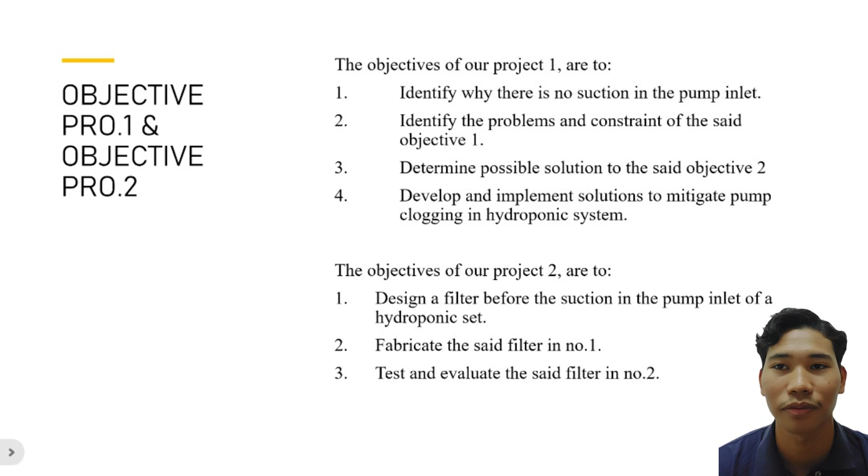Next slide is our scope. Research and analysis: conduct thorough research on filter types for hydroponic systems, and analyze effectiveness.

Design and development: create a tailor-fit design considering dimension, material and configuration. Prototype testing: fabricate a prototype for rigorous testing and evaluating filtration efficiency and durability. Optimization: refine the filter design based on prototype feedback for enhanced effectiveness.

Implementation: develop installation procedures and training for personnel, readying the filter for integration. Monitoring and maintenance: establish a maintenance schedule for regular monitoring, cleaning and replacement of the filter.

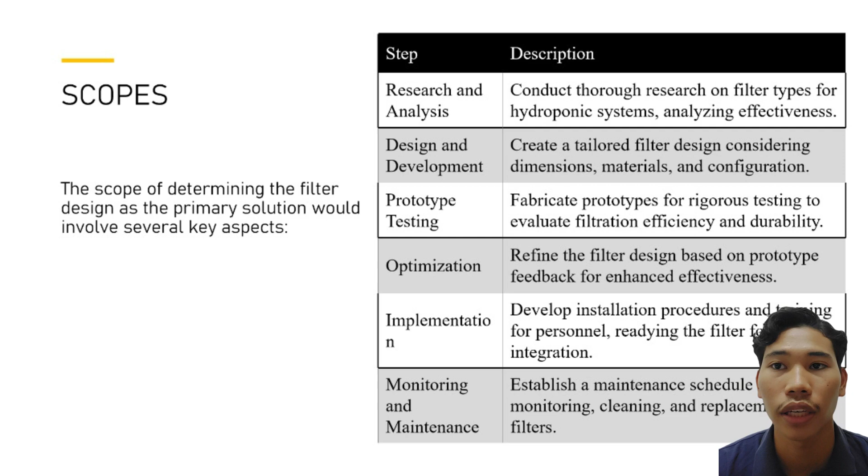Next slide is our literature review. In the first journal, we refer to the introduction of hydroponics, which is commonly used. We can analyze the advantages and disadvantages of this system.

For the second journal: because the spray nozzle often clogs, continuous maintenance is required for the system, due to the propensity of the spray nozzle to clog, which can block the proper functioning of the aeroponic system. Regular attention is required to ensure the nozzle remains clear of any obstruction, thus maintaining optimal misting efficiency and preventing any disruption to the growth of the plant.

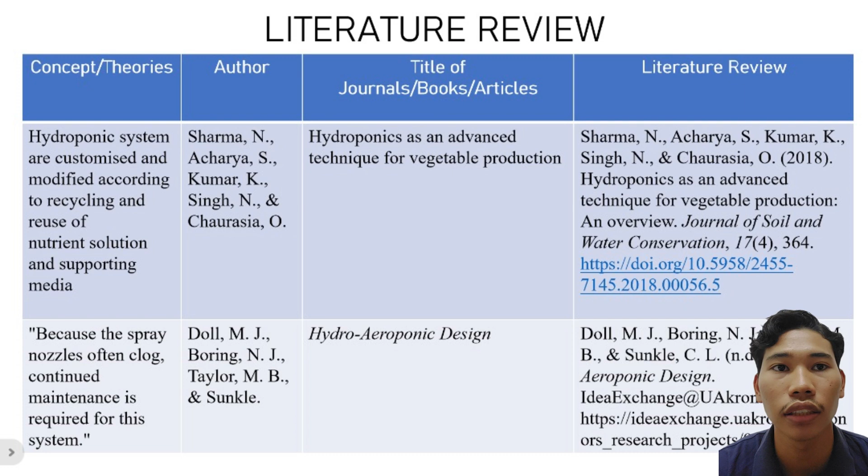For the third journal: additional filtration is particularly crucial when dealing with fine root plant species, due to their propensity for shedding smaller fragments that can easily infiltrate and clog the supply line. Fine roots are good at producing tiny particles, which if not properly filtered out, pose a significant risk of obstructing the flow of nutrient solution through the system.

Therefore, implementing an effective filtration mechanism becomes imperative to ensure the smooth operation and longevity of the hydroponic setup, especially when accommodating plant varieties with delicate and compact root structures.

For the last journal, as we can see, the horizontal hydroponic design can cause clogging problems because there is no angle, meaning 90 degrees. So the design must have a bit of angle to make the water flow smoothly, and there is no stagnant water.

Okay, for the next slide, I pass to my next presenter.

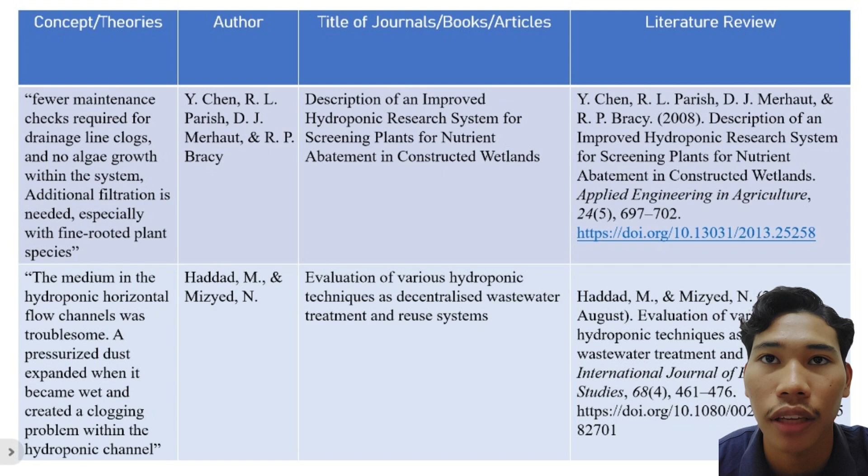So I want to present my flow chart for this project. This is our flow chart that we use as our guideline to attain this project for this semester. We begin by forming the group, then brainstorming ideas to our likings. Then we worked on the case study, survey and data collection from users.

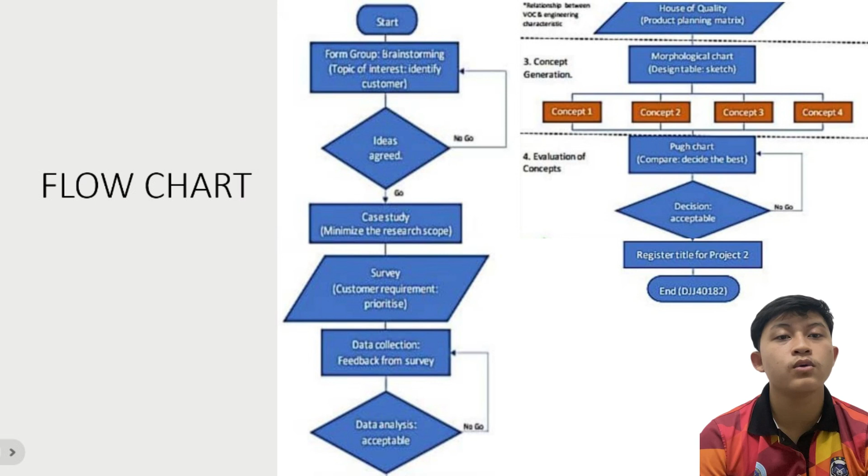After the data was collected and analyzed, we found that the data was in line with the problem we discussed for our project. After that, we went on to create a house of quality table. Then we started to do a morphology chart to decide our own design. We also did a Pugh chart after we got our own design to see which design is suitable for the environment.

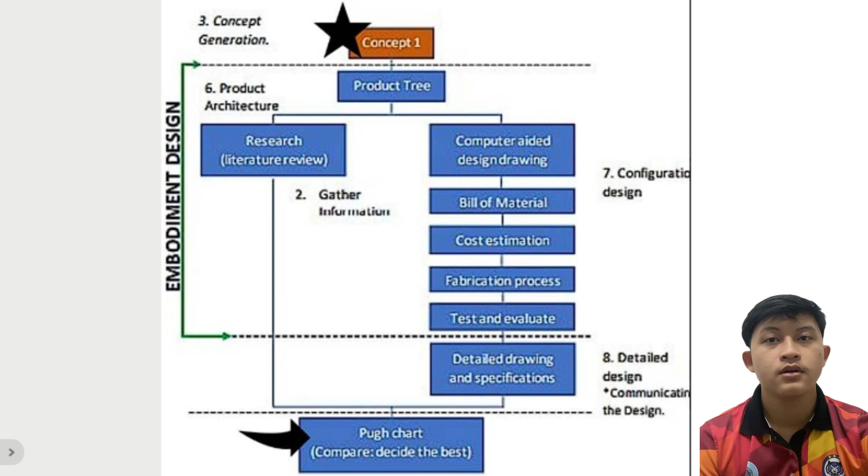Next slide is how each concept is developed. Next slide is survey need analysis.

Our group went to Pejabat Pertanian Daerah Kinta to make a survey and analysis of how they use the hydroponic system, and asked them if they had any problems when using hydroponics. According to the officer in charge, there was a blockage in the water pump that prevented water from getting to the growing pipe, which led to the death of the planted trees.

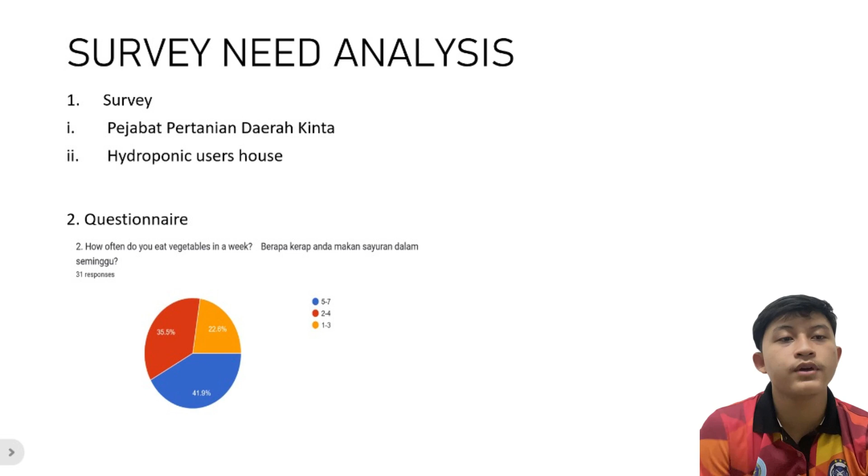Second, we did a questionnaire. According to the question above, most of the users, 41.9%, often eat vegetables 5 to 7 times a week. So we need to make sure the pot capacity of the design can fulfill the needs of the user.

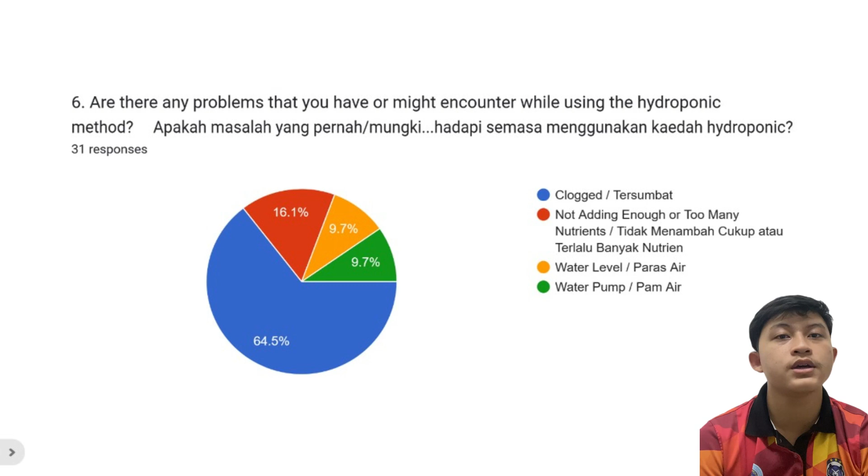Next slide is the next question. According to the question above, 64.5% of users face the same problem, which is clogging. We can conclude that clogging is the most common problem among hydroponic users that needs to be solved.

This is our morphological chart that we have done to decide our own design for this project.

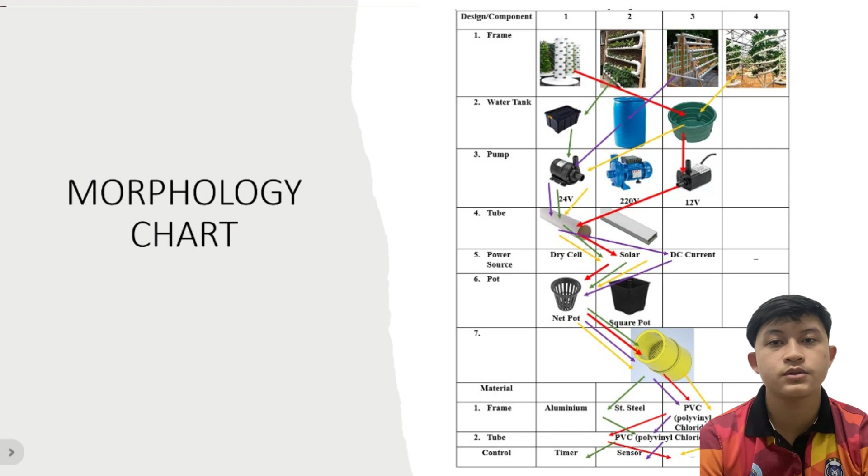In this slide, there are 4 concepts. Each concept can be clicked on and there will be a figure shown for each concept.

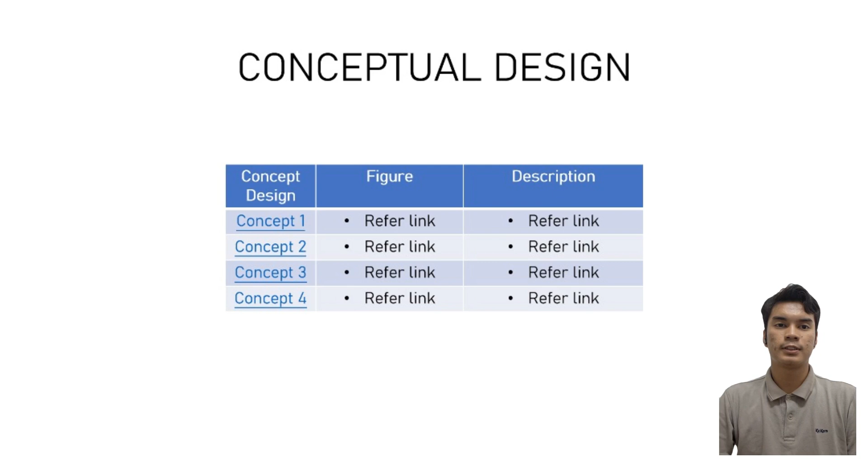The first concept is created by Muhammad Adi Aryanto. It can save space and be put anywhere in the home without using much space. It's cheap, as the material used is very cheap compared to current hydroponic designs. This concept is also highly portable, as it can be assembled and disassembled without problem. It's eco-friendly because it uses a small water pump and no clay in its construction. Lastly, it is lightweight and can be carried without needing any gardening tool.

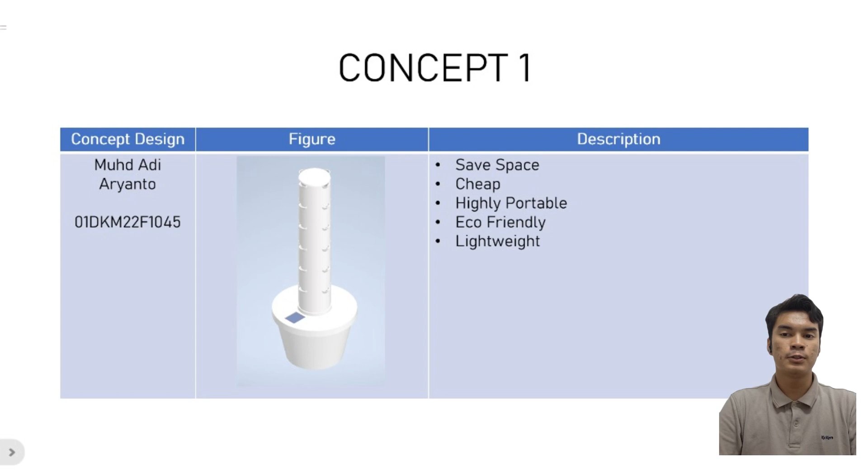Concept 2 is created by Muhammad Taufik Hakim bin Dahrum. Its description is: save space, lightweight, eco-friendly, easy to assemble and disassemble, and can store lots of plant.

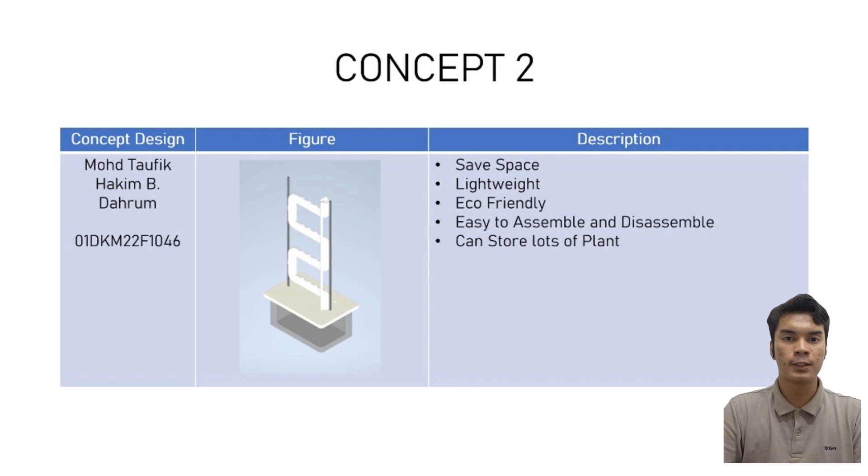The next concept is created by myself, Muhammad Aminuddin bin Mohd Zawahi, and it is eco-friendly, durable, can plant lots of plant, and has a large capacity of water.

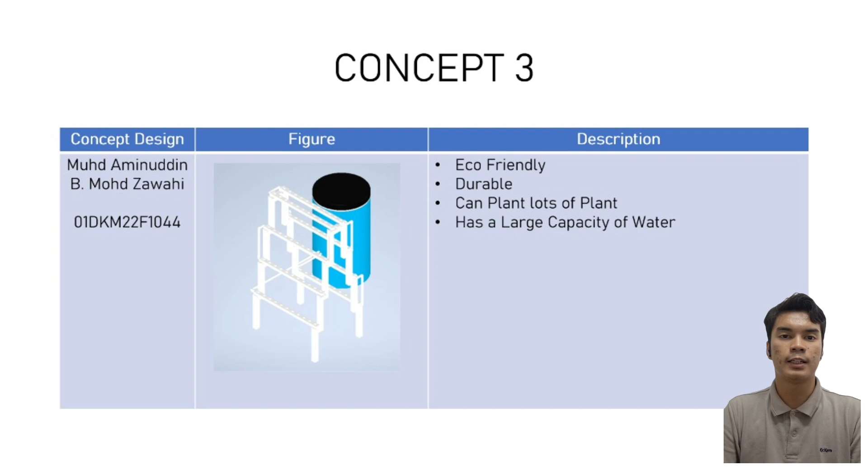Lastly, this concept is created by Izry Azim bin Azizul. It is eco-friendly, durable, easy to assemble and disassemble, and more aesthetic in design, looking elegant and able to be placed anywhere in the living compound.

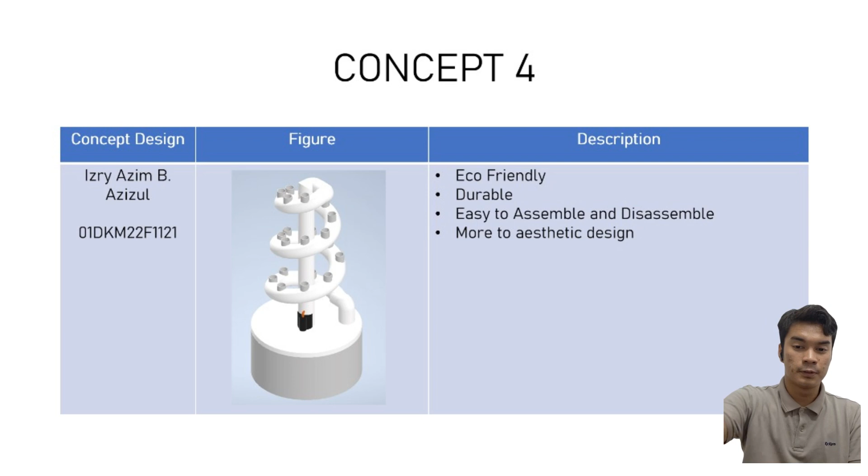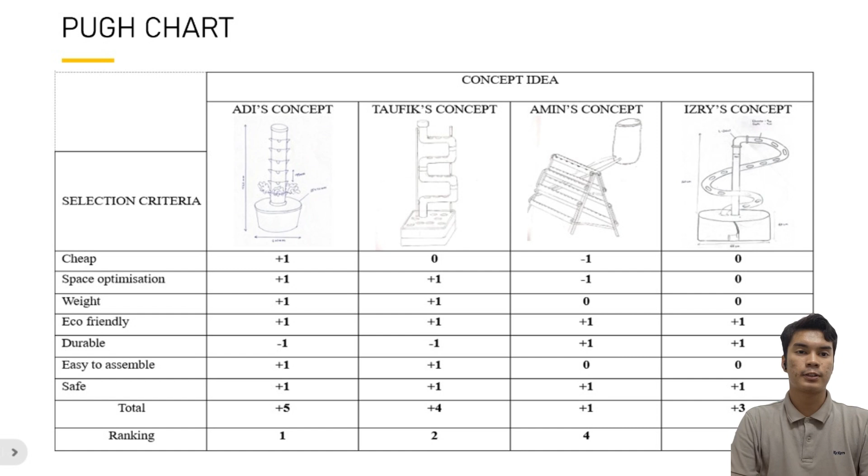The last slide from me is our Pugh chart, where we decide which design is the best based on the selection criteria. That's all for me. Thank you. Assalamualaikum warahmatullahi wabarakatuh.

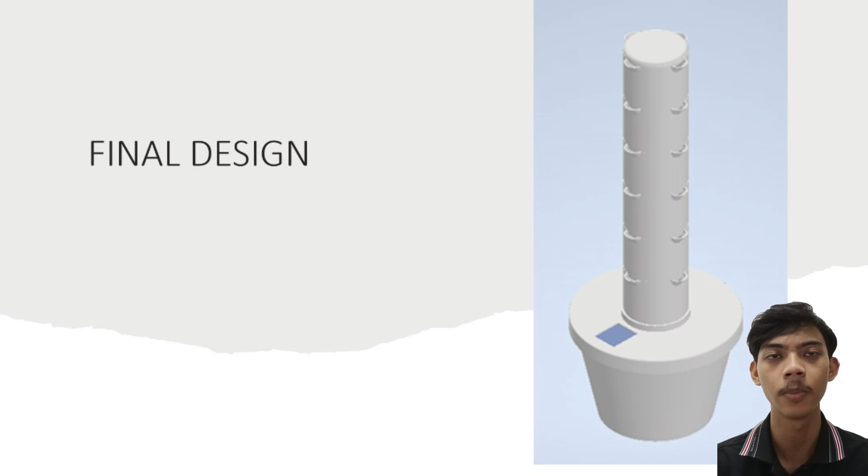The next slide is the ISO drawing of the final design. Here is our design's ISO drawing. The model is made by assembling 7 different parts using Autodesk Inventor.

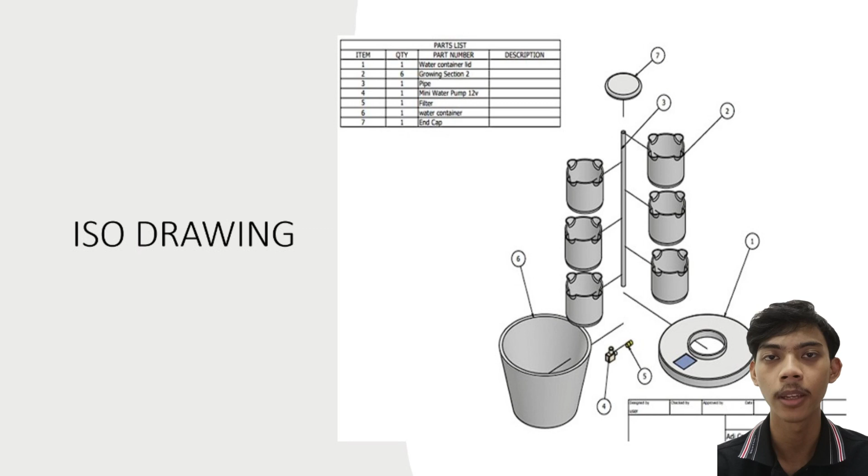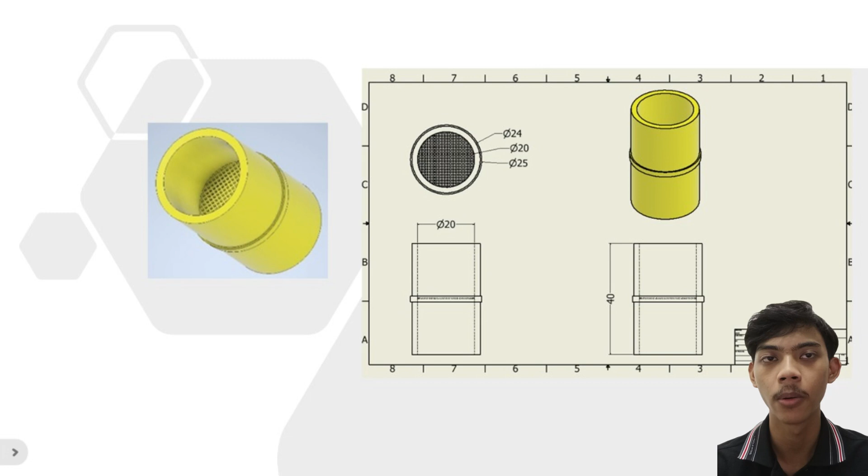The next slide is the water pump filter ISO drawing. This is our own design water pump filter that will be attached to the pump inlet to combat the clogging problem in our hydroponic system, and hopefully one day will be used in every hydroponic setup around the globe.

Next slide is fabrication and testing. First, growing pot: in the first step, we take a 7-inch PVC pipe and cut it into 6 pieces using a saw, making sure all pieces are the same size. After that, we cut 1 inch for the pot hole every 45 degrees to get 8 holes.

Next, we use a heat gun at the pot hole cutting to make the PVC pipe soft, so we insert a 1-inch pipe to open the cutting into a hole. We wait until it cools before touching it.

Next, filter: we use a 3D printer to make the filter for the water pump inlet. Finally, assembly: first, we put the water container on the ground, placing the water container lid on top.

Then we connect a 1-inch pipe to the center of the water container lid to use it for water flow to the top and as a frame to make it stable. Next, we connect the mini submersible water pump to the underside of the water container lid.

Proceed by stacking the growing pots one on another. After that, fill the water container with nutrient-rich water and load the tower seedlings. Lastly, connect the submersible water pump to the power source.

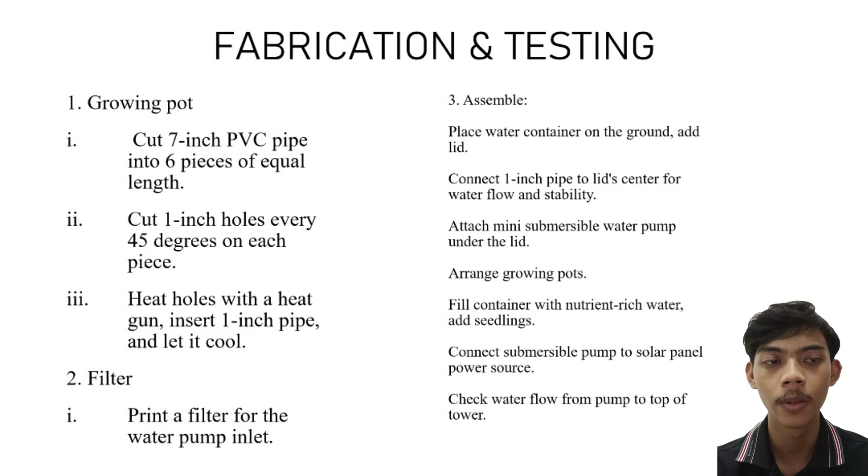In this project, we use a solar panel as the power source, so we connect the pump to the solar panel. Lastly, turn on the water pump and at the top of the tower, check if the water comes out of the pipe.

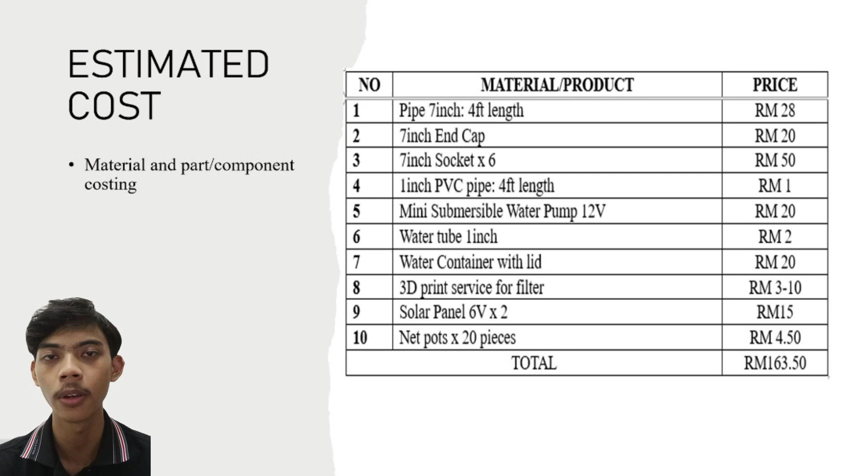Next slide is the estimated cost of our final design. This is the estimated cost of each component of our hydroponic design. These prices are based on our research and comparison of online store pricing as well as local hardware store pricing. Next slide is the fabrication costing.

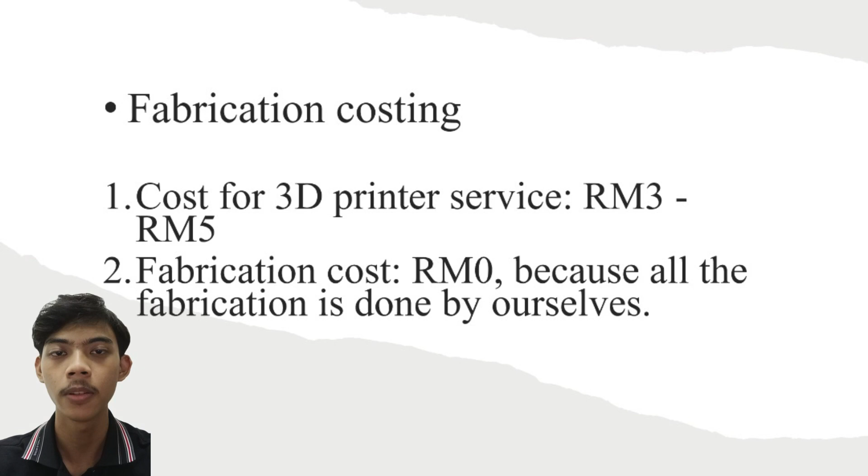Cost for the 3D printer service is RM3 to RM5. Fabrication cost is RM0 because the fabrication is done by ourselves.

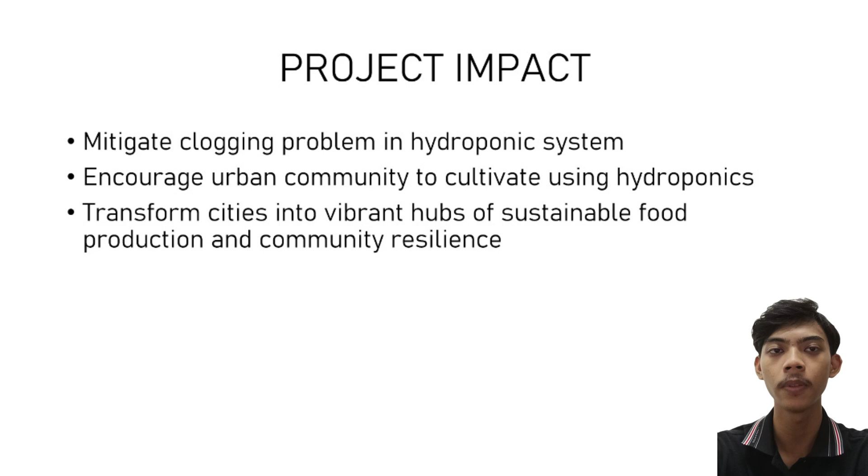Next slide is the project impact. This project has a positive impact on the urban community by reducing the clogging problem in the hydroponic system, making it easier to manage hydroponic systems in urban settings, thus encouraging the urban community to cultivate using hydroponics, indirectly transforming cities into vibrant hubs of sustainable food production and community resilience.

Addressing the clogging problem in hydroponic systems is crucial for sustainable urban agriculture because it ensures efficient use of resources, maximizes space, conserves water, maintains food security, reduces costs, minimizes environmental impact, and keeps the community engaged.

By tackling clogging issues, urban farmers can create more effective and resilient hydroponic setups, helping to produce fresh food in cities while minimizing problems that could affect productivity and sustainability. That's all for our presentation. Thank you very much.